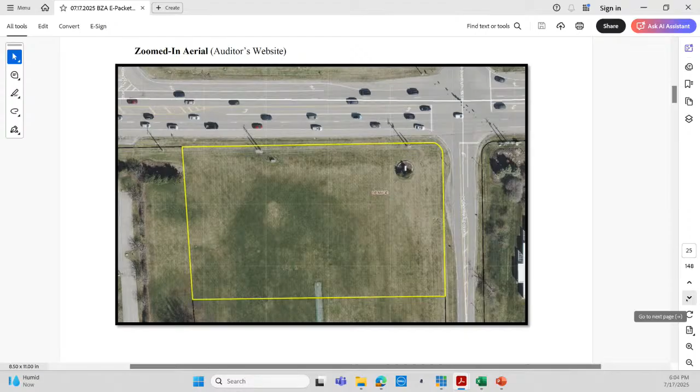Zoomed out, this is at the intersection of East Powell Road and Green Meadows Drive South, about a half block or so east of US 23.

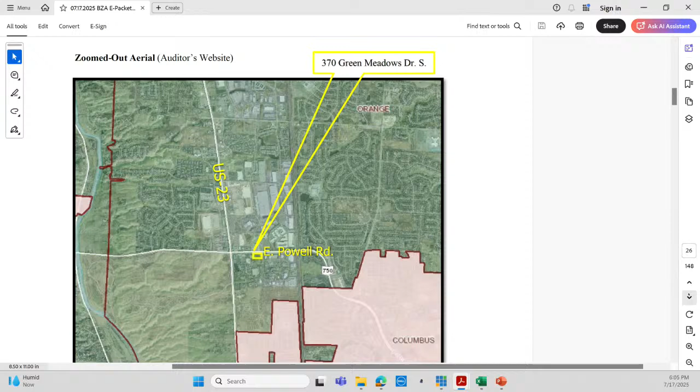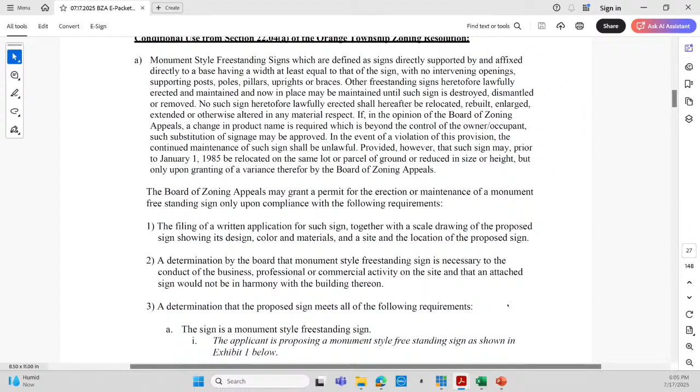All right, so staff review, this is from section 22.04A, which is the conditional use standards. So we'll jump down to A, starting with 3A. You may disregard the highlights too, those can be overlooked.

So a determination that the proposed sign meets all the following requirements, that it is a monument-style freestanding sign. The applicant is proposing a monument-style freestanding sign as shown in Exhibit 1 below. The maximum height of such sign does not exceed 8 feet above the average grade of the site, and the sign is located at a distance from any street right-of-way line as required. So according to the Exhibit 1, the proposed sign will be 8 feet 0 inches tall and meets this requirement. I will note that this is a difference from the previously proposed application.

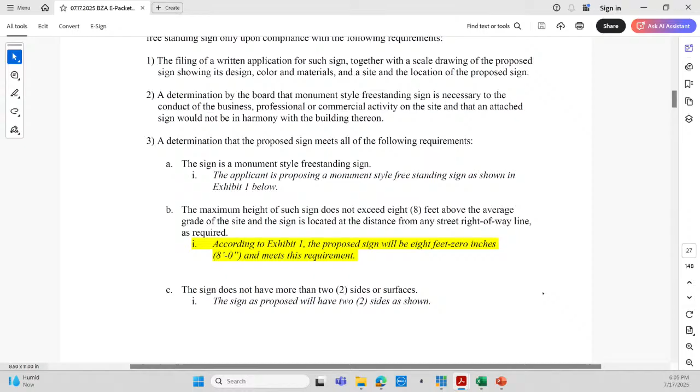So the sign now meets the height requirement. For C, the sign does not have more than 2 sides or surfaces. The sign as proposed will have 2 sides as shown. The display area of any one side or surface does not exceed 1/2 of the total display area permitted. A single sign face totals approximately 64 square feet, when only 64 square feet per face is permitted, and it meets this requirement.

For E, the total display area of all surfaces does not exceed 32 square feet, or a maximum of 16 square feet per side or surface, when the sign is located 15 feet from the primary frontage street right-of-way line. For each additional 1 foot setback from the street right-of-way line, an additional 8 square feet of total display area, or maximum of 4 square feet per side, will be permitted up to a maximum of 128 square feet total, or 64 square feet per side.

The proposed 2-sided sign will total approximately 64 square feet per side and 128 square feet for both sides. The sign will be set back 32 feet and 10 inches from the right-of-way line along East Powell Road, so only 64 square feet per side is permitted. I will note that that meets the above requirements.

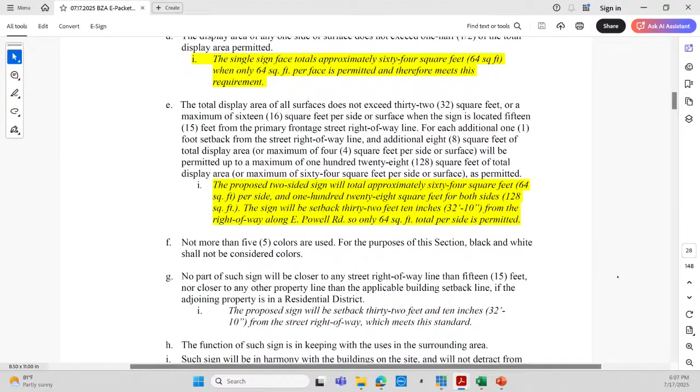For G, no part of such sign will be closer to any street right-of-way line than 15 feet, nor closer to any property line than the applicable building setback line if the adjoining property is in a residential district. The proposed sign will be set back 32 feet and 10 inches from the street right-of-way line, which meets this standard.

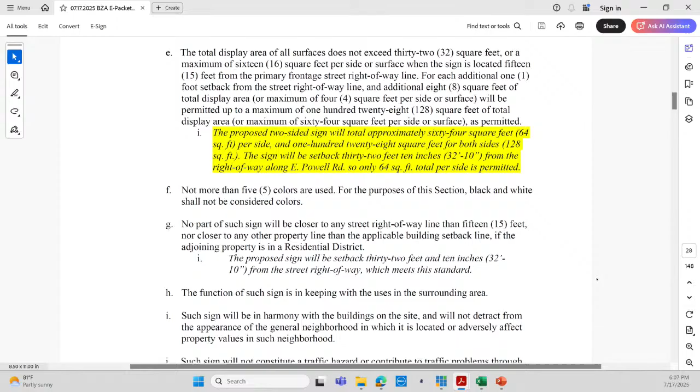Now we'll move along into the exhibits. Exhibit 1 includes the monument sign site plan. This is unchanged, essentially. It's the same location as existing, which we measured as 32 feet and 10 inches at the closest point from a right-of-way line.

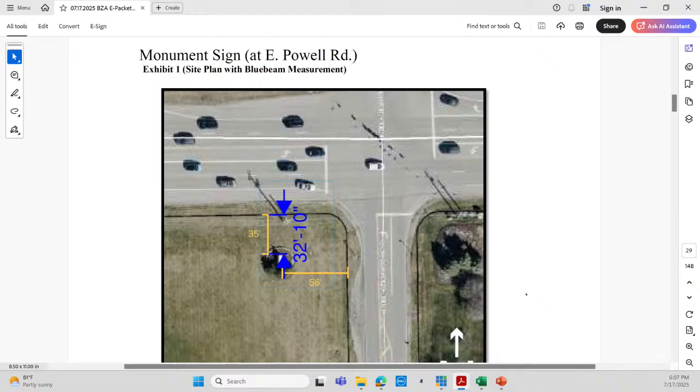Finally, we have the conditional use board analysis and criteria for the board's consideration, as well as example proposed motions. I'm happy to answer any questions the board has at this time.

Any questions from the board? No questions. Just a reminder, I am recusing myself from the nationwide cases. Okay, thank you for that mention. I'd also like to make everyone aware that I was not here for the last meeting regarding these signs, but I have watched the minutes and taken in all of the information, and I'm prepared for a decision this evening. Appreciate that as well, Ms. Ross. Is the applicant here?

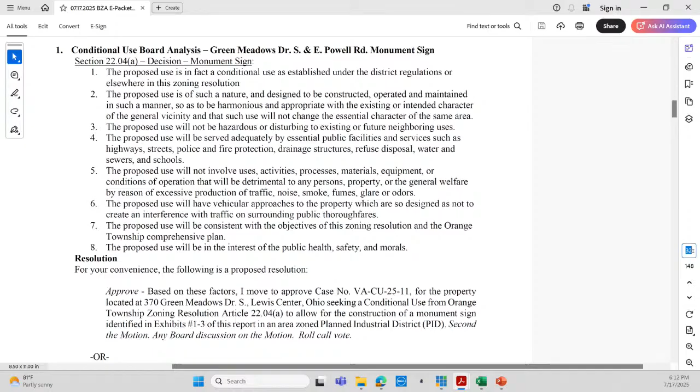Okay, we will go into the second Nationwide Realty Investors case. This is an item of new business, submitted before the deadline for tonight's meeting. This is for the same location that a previous case was proposed for last month, at 23 and Green Meadows Drive T-intersection.

So I will refer to the new staff report. The site here is 370 Green Meadows Drive South, and this is that 28.6 acre parcel.

This request entails seeking two area variances from Section 22 to allow a monument-style sign which exceeds the allowable display area and exceeds the maximum permitted height. Also, this is seeking a conditional use from the Orange Township zoning resolution to allow a monument sign.

So I believe, and we will double check with Julie, but they will also need a variance request to allow for that additional monument-style sign per business establishment. So there will be 2 monument-style signs on the same parcel.

The subject parcel is located at 370 Green Meadows Drive and is owned by 100 Green Meadows Drive LLC. It is the location for the current Nationwide Hotel and Conference Center.

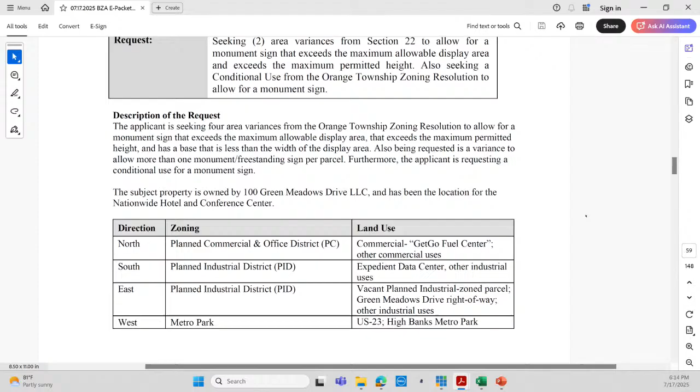Since we have some changes here as compared with the previous application, I tried to summarize the history. Let me go right into that.

Previously, an exterior modifications permit was submitted under permit number 2024-0545 and approved October 31st, 2024, for the site to undergo changes, including a new patio with retaining walls, seating walls, grill, outdoor cooking areas, concrete footers, all located along the southeast side of the primary building.

During last month's BZA meeting, which occurred June 12, 2025, for the monument-style sign, the applicant requested 4 area variances from the Orange Township zoning resolution, including for sign area display, maximum permitted height, a base that was less than the width of the display area, and more than one monument freestanding sign per business establishment on the same parcel, as well as the conditional use. Only the height variance was granted at 18 feet 0 inches at that meeting.

The previous sign was proposed at 198 square feet of area per side, with dimensions 18 feet tall by 12 feet wide. By comparison, the sign being presented within this application is 116 and a half square feet of area per side, with dimensions of 14 feet 9 inches tall by 8 feet 8 inches wide.

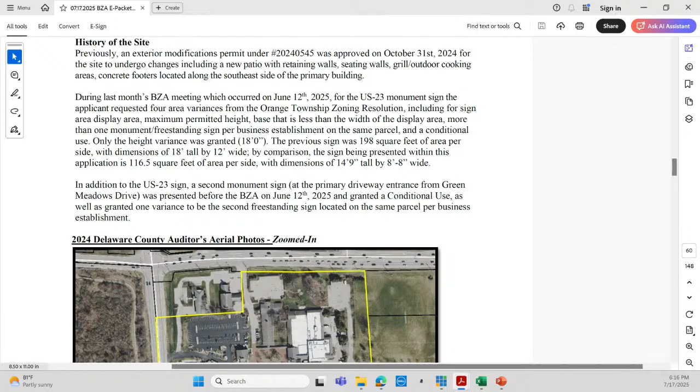In addition to the US 23 sign, a second monument sign at the primary driveway entrance from Green Meadows Drive, a little bit to the east, was presented before the BZA that same meeting and granted a conditional use, as well as granted one variance to be the second freestanding sign located on the same parcel per business establishment. Given that they're presenting a new sign, we're putting that variance back just to be crossing our Ts, dotting our Is.

Into the aerial photo views. This is the zoomed-in aerial, and the request, as you may remember from the last meeting, includes the sign area that is at the far southwest part of the parcel.

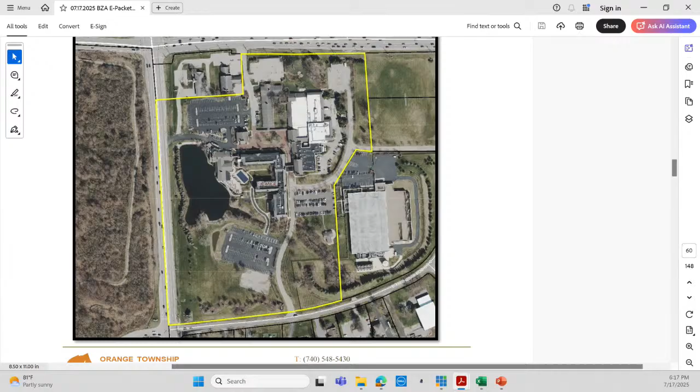We'll have the zoomed-in view from the applicant's plans here. And the zoomed-out view includes the 28-acre parcel. It shows the outline there, and this is at the intersection of US 23 and East Powell Road.

As for the last case, I will go through the conditional use criteria. For section 3A, determination that the proposed sign meets all the following requirements: the sign is a monument-style freestanding sign. The applicant is proposing a monument-style freestanding sign as shown in exhibits 1 through 5 below. The maximum height of such sign does not exceed 8 feet above the average grade of the site, and the sign is located at the distance from any street right-of-way line as required.

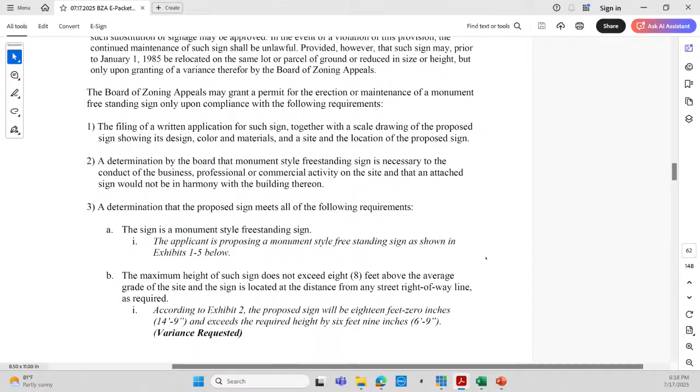According to Exhibit 2, the proposed sign will be 14 feet 9 inches, which exceeds the required height by 6 feet 9 inches. The maximum allowable height is 8 feet, and this exceeds that by 6 feet 9 inches. Therefore, a variance is required.

For C, the sign does not have more than 2 sides or surfaces. The sign as proposed will have 2 sides as shown.

For D, the display area of any one side or surface does not exceed half of the total display area permitted. The single sign face totals approximately 116.5 square feet, when only 64 square feet per face is permitted, so a variance is being requested.

For E, the total display area of all surfaces does not exceed 32 square feet, or a maximum of 16 square feet per side, when the sign is located 15 feet from the primary frontage street right-of-way line. For each additional foot setback, an additional 8 square feet of total display area, or 4 square feet per side, is permitted, up to a maximum of 128 square feet total, or 64 square feet per side.

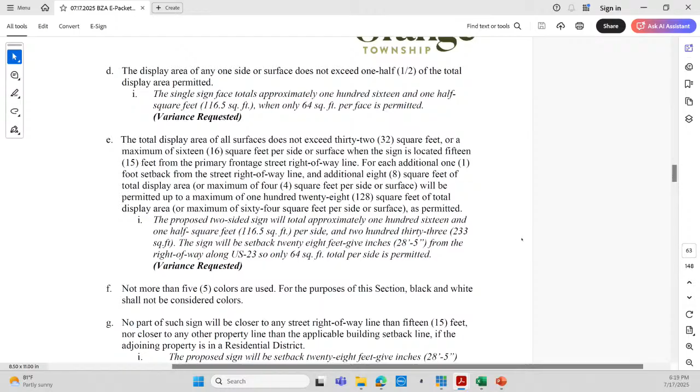The proposed 2-sided sign will total approximately 116.5 square feet per side and 233 square feet for both sides. The sign will be set back 28 feet 5 inches from the right-of-way line along US 23, so only 64 square feet per side is permitted. That means a variance is being requested for this.

For G, no part of such sign will be closer to any street right-of-way line than 15 feet, nor closer to any property line than the applicable building setback line if the adjoining property is in a residential district. The proposed sign will be set back 28 feet 5 inches from the street right-of-way line, which meets this standard.

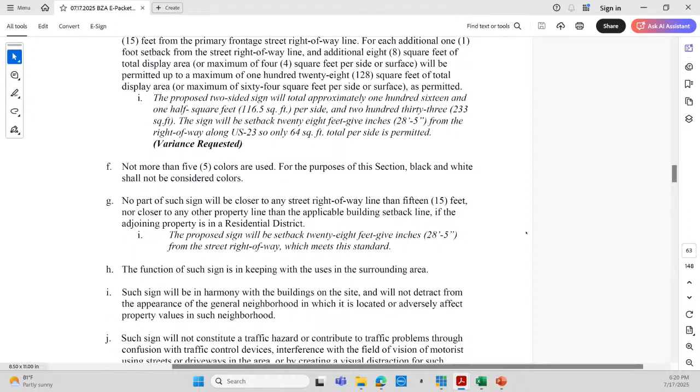All right, that was it for our responses to the criteria. Continuing with the staff review is the exhibits.

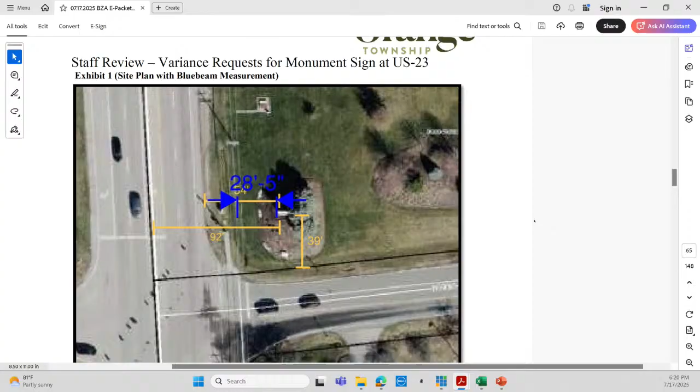This is the zoomed-in exhibit I was referring to that establishes the proposed location, which is essentially the same as the existing sign, at 28 feet 5 inches from the right-of-way line.

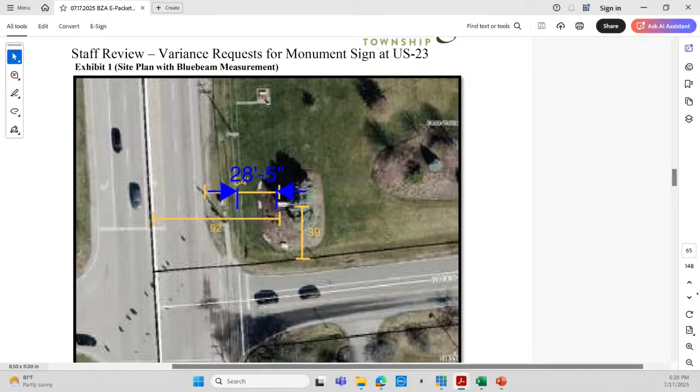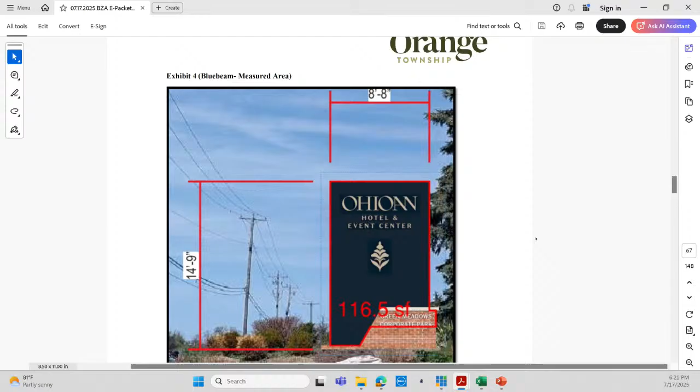Exhibit 4 shows the measurement for the area per side. That does include the lettering just below the blue area on the brick, which refers to Green Meadows Corporate Park.

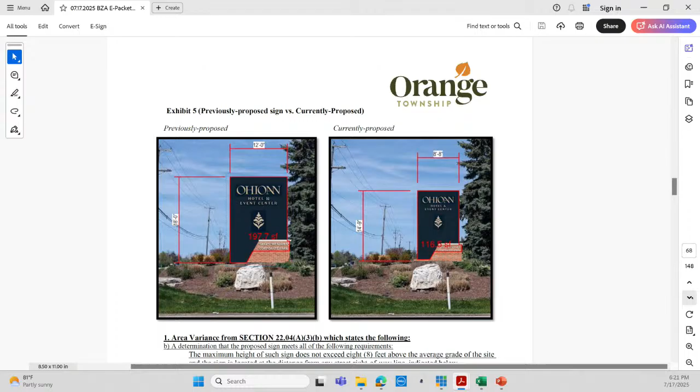Just to make a comparison to the last case you saw, the previously proposed sign, 197.7 square feet, is shown on the left. The currently proposed sign, 116.5 square feet, is shown on the right.

As far as the variance, this is an area variance from Section 22.04A3B that requires the maximum height of such sign not exceed 8 feet above average grade, with the sign located at the indicated distance from any street right-of-way line. The monument sign at US 23 is proposed to be 14 feet 9 inches, representing a 6-foot 9-inch variance request. This is roughly an 84% variance request from Section 22.04A3B.

For the second variance, that's an area variance from Section 22.04A3E, which states in part the following, and we included the table showing the allowed area based on the distance setback. With this being further than 27 feet away from the right-of-way line, the sign must be 64 square feet per side and 128 square feet for both sides at its largest.

The display area of the monument sign proposed at US 23 is 116.5 square feet, which exceeds the maximum of 64 square feet per side or surface by 52.5 square feet. This is roughly an 82% variance request.

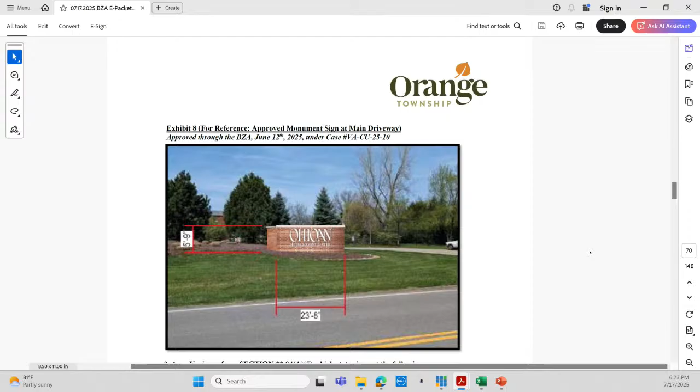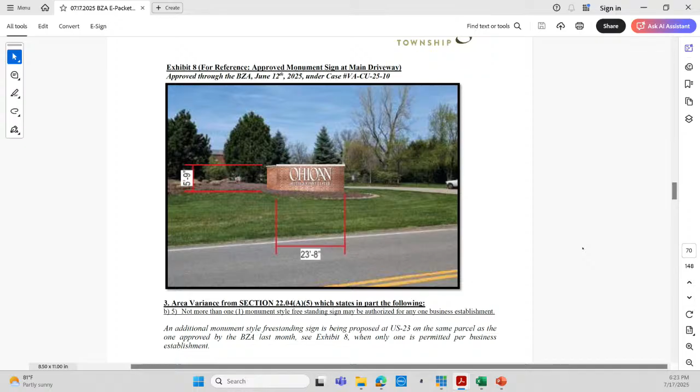Included is the sign that you, as the BZA, had approved in the last meeting, just for your reference. Below that is the third area variance that is needed, from Section 22.04A5, which states in part the following.

Not more than one monument-style freestanding sign may be authorized for any one business establishment. An additional monument-style freestanding sign is being proposed at US 23 in Green Meadows on the same parcel as the one approved by the BZA last month in Exhibit 8, when only one monument-style freestanding sign per business establishment is allowed.

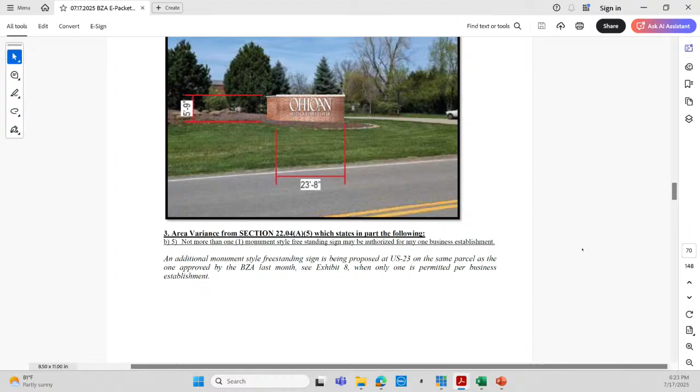All right, well, the last part is the criteria for consideration for area variance, as well as the example motions. Please let me know if you have any questions. No questions. Anyone? I don't think we have any questions.

We have taken your feedback into consideration, and we have reduced the size of the ask. We have reduced the size of the sign as we originally designed it, and at this point it is actually a little bit smaller than the existing sign that's there. We have increased the width of the base in order to make sure that is as wide as the rest of the sign, as per code, so we're asking for less variances. And I think that we've done our best to try to accommodate all of your requests.

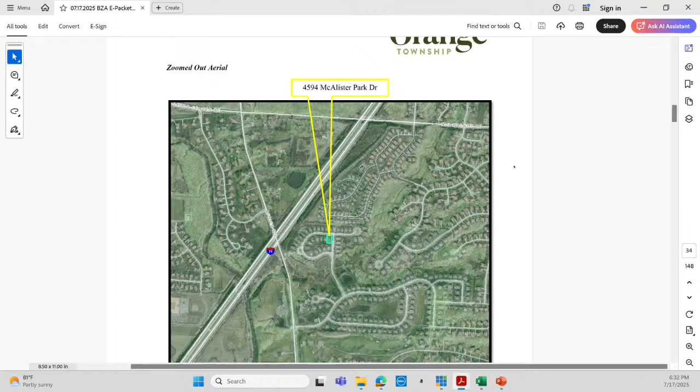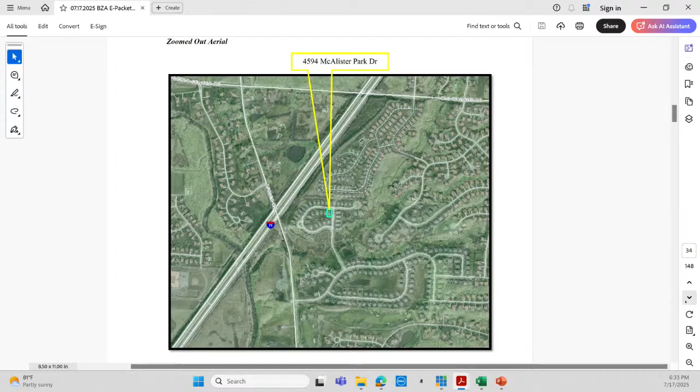We have a zoomed-out aerial for your context view, so it's in the neighborhood here. However, I-71 would border this neighborhood to the west. This zoomed-in aerial shows the property boundaries highlighted in green, and this lot, for your reference, is a corner lot at the corner of McAlister Park Drive and Enclave Drive.

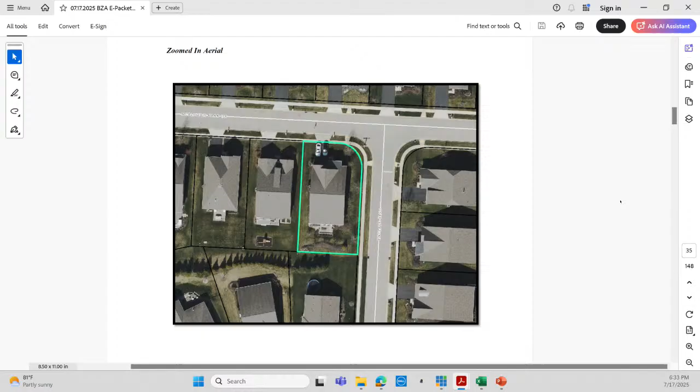Going to the staff review, this is a variance request from the side yard setback. It's an area variance specifically from rezoning case 12-0223, Enclave at the Lakes, SFPRD. The side yard setback requirement in the Enclave at the Lakes is 12.5 feet. The egress window will encroach 3 feet and 0 inches into the 12-foot, 6-inch side yard setback. This is roughly a 24% variance request from rezoning case 12-0223, Enclave at the Lakes, SFPRD.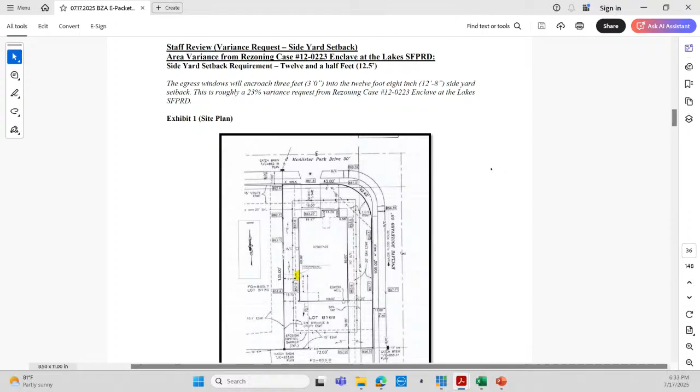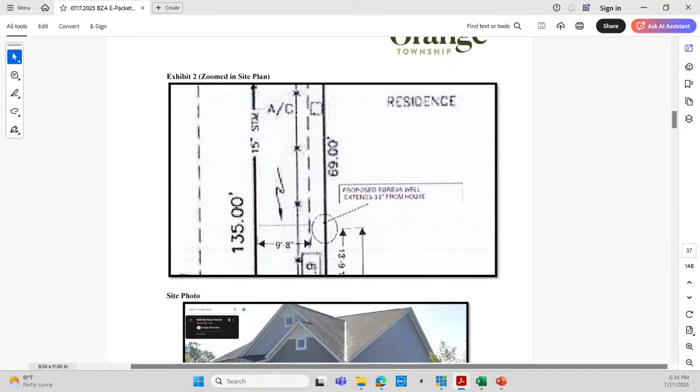It is somewhat faint, so we did blow it up on the next exhibit for you. Zoomed in here, there's the proposed egress window at a 9-foot, 8-inch setback from that side yard with the protrusion of 3 feet. And just to correct, I believe that's a 12-foot, 8-inch side yard that's required, so that's why we have the 3 feet and 0 inches encroaching listed.

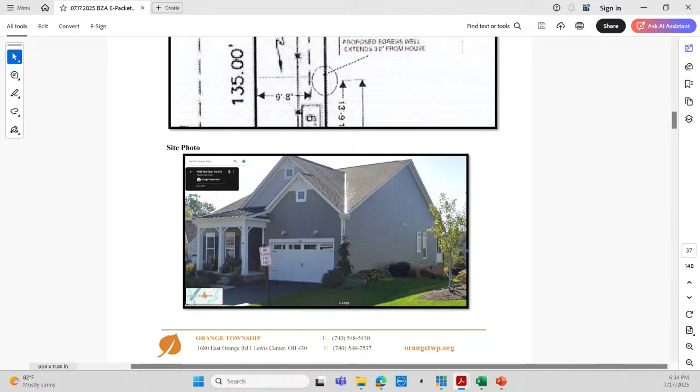We did take a site photo view that generally shows you the side of the house, which is opposite the corner side, so it's opposite the two-street side that is being proposed. The last section is just the criteria for consideration for the area variance from side yard setback, and example motions.

Is the applicant here?

Hello everybody, Charles Kovach, 4594 McKinley Park Drive, Westerville, 43082. You've been sworn in, yeah. And Jennifer Kovach, 4594 McKinley Park Drive, Westerville, Ohio, 43082, and I've also been sworn in.

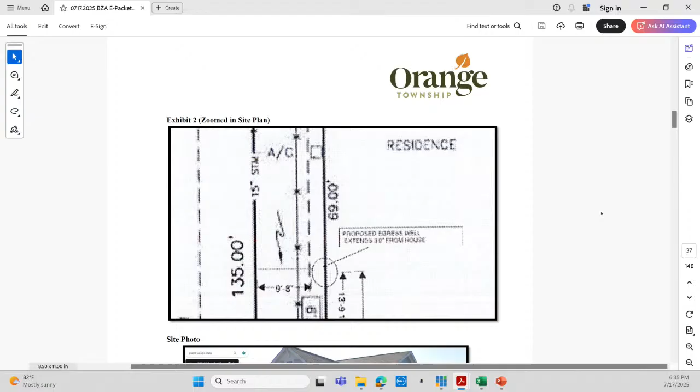I work from home, my office is in the basement. I would love some natural light. As you see, it's not my tree, it's like yards there, but the window well would not even go past the mulch bed. It's closer to my house than the air conditioner that's on that same wall. We've also had it approved by our homeowners association as well.

Okay. Questions from the board?

Questions? If the HOA approved it, then I'm not sure what we... I saw, I'm sorry, go ahead. I saw in here they said you have to have it done within 90 days. Are you good with that? Contractor's ready as soon as we call him. Doesn't matter to us, I was just...

All right, we can move this one to next month, right? Shoot, he needs some light. Get some plants down there.

All right, can we make a motion? Yep, public comment, do you have a question? Wait, oh wait, other comments? Public comments?

Is your next door neighbor here, the one that is in between? Okay, okay, thank you. Now, now, now, impatient, aren't I?

Based on factors discussed this evening, I move to approve case number VA 25-12 for property located at 4594 McKinley Park Drive, Westerville, Ohio, seeking an area variance from rezoning case number 12-0223, Enclave at the Lakes, to allow for an egress window to encroach into the 12-foot, 8-inch side yard setback in an area zoned single-family residential district.

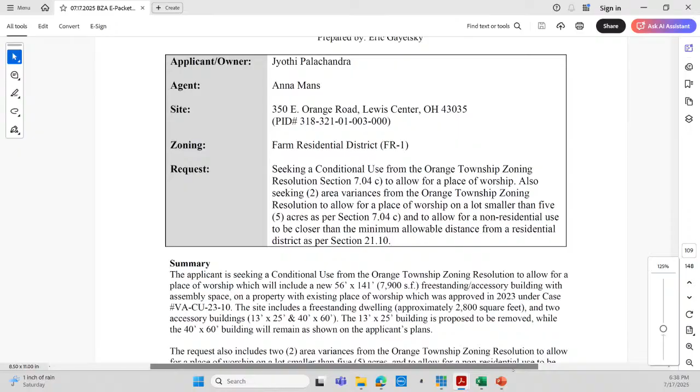The applicant is seeking a conditional use from the Orange Township zoning resolution to allow for a place of worship, which will include a new 56 by 141, which is 7,900 square feet, freestanding accessory building with assembly space on a property with an existing place of worship, which was approved in 2023 under BZA case VA-CU-23-10. The site includes a freestanding dwelling, approximately 2,800 square feet, and two accessory buildings, which are 13 by 25 and 40 by 60 respectively. The 13 by 25 building is proposed to be removed, while the 40 by 60 building will remain as shown on the applicant's plans.

The request also includes two area variances from the Orange Township zoning resolution to allow for a place of worship on a lot smaller than 5 acres and to allow for a non-residential use to be closer than the minimum allowable distance from a residential district as per Section 21.10.

For the surrounding area, the direction to the north, the zoning district is planned commercial and office district, as well as planned industrial district. The land uses here include Olentangy Local School District offices and a U.S. Post Office, and that does also include the Orange Road right-of-way.

Direction to the south, the zoning district is planned multifamily planned residential district, and the land uses include Hidden Ravines condo residences. To the east, the zoning district is planned commercial and office, and land use includes the toy box. To the west, zoning is multifamily planned residential district and planned commercial office district. The land uses include Hidden Ravines condo residences, which is part of the same property, and Healthy Pets veterinarian.

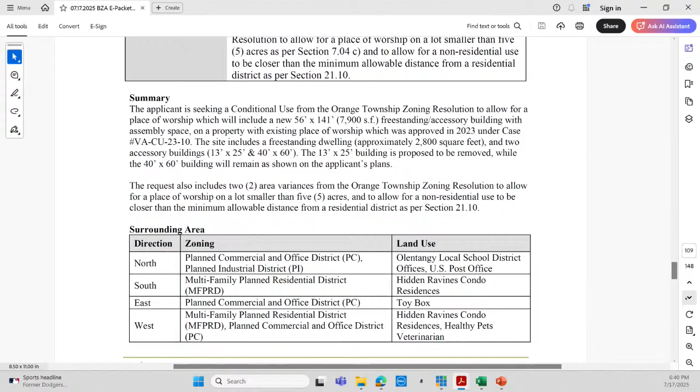Based on some history here at the property, I wanted to include that in the staff report for the board's familiarity. This property was previously granted a conditional use in 1998 under case number 8641 for a home occupation. The first approved use that was here was for a physical fitness and training gym to be placed in the accessory building.

In addition, the applicant obtained a conditional use from Section 7.04C of the Orange Township zoning resolution on May 18th, 2023, to allow for a place of worship under case VA-CU-23-10. As part of that request, the applicant was also granted an area variance from Section 7.04C to allow for a place of worship on a lot smaller than 5 acres.

The place of worship proposed is located at 350 East Orange Road. That was to clarify that it was the variance because of the property being 3.35 acres when 5 acres is the minimum required lot size per farm residential district.

On February 29th, 2024, a zoning permit for exterior modifications under 2024-0129 was approved to allow for the existing gravel parking area to be paved. Furthermore, a conditional use for a monument sign was granted on June 20th, 2024, under case CU-24-15, and approved under zoning permit 2024-0340.

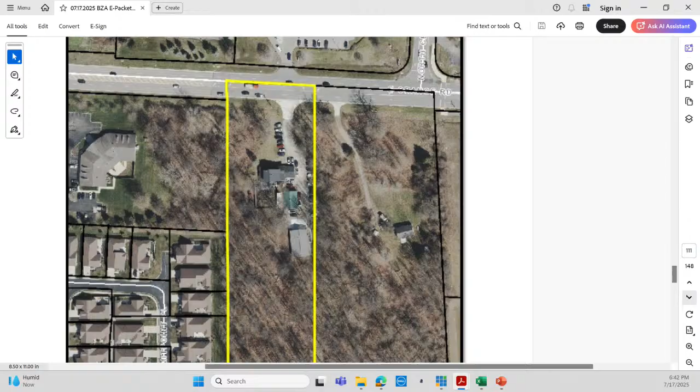Before we get to the exhibits, the staff review portion describing the area variances and conditional use. This is area variance and conditional use from Section 7.04C of the Orange Township zoning resolution. This states in Section C that churches or other places of worship, provided they occupy a lot of not less than 5 acres plus 1 acre for each 100 permanent seats, over 300 in the main assembly area.

The proposed use for a place of worship requires a conditional use granted by the Board of Zoning Appeals as outlined in Section 7 of the Orange Township zoning resolution. As noted above, the applicant was previously granted an area variance from Section 7.04C to allow for a place of worship on a lot smaller than 5 acres, which again was under VA-CU-23-10, approved May 18th, 2023.

The proposed site has a total acreage of 3.35 acres, and in this application, the applicant notes that an occupancy of about 400 people is planned, while according to the applicant, the current facility accommodates about 150 people. No additional acreage is required for the number of seats, but the property does not meet the minimum acreage requirement of 5 acres and requires an area variance.

So the parcel of the proposed place of worship is 1.65 acres smaller than 5 acres. This means that this is a roughly 33% variance request.

For the next area variance, that's from Section 21.10, requirements for non-residential uses abutting residential districts. This states, the purpose of this section is to mitigate the effects of noise, light, and other nuisances emanating from a non-residential use abutting a residential district. Non-residential buildings or uses, except parking, shall not be located or conducted closer than 100 feet to any lot line of a residential district. Such 100-foot area shall include at or near its perimeter acceptable landscaping or screening as approved in the planned district of development, or in the case of property located outside of a planned district, as approved by the zoning inspector.

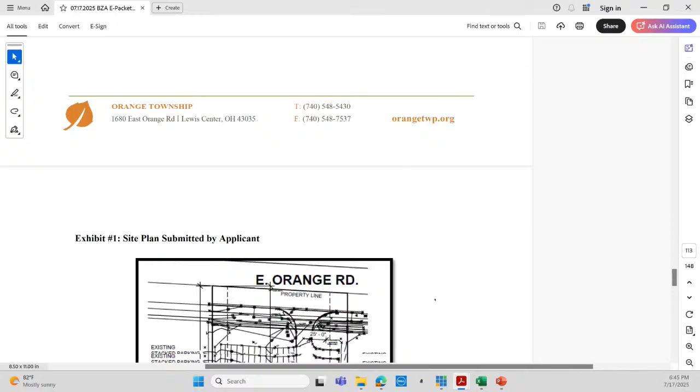So firstly, we have the site plan for the new facility. I do want to touch on that the area that you see hatched includes the new parking facilities that are not currently there. Generally speaking, they will wrap around the new freestanding building that will belong to the temple. You can see, if you look closely, the existing building that is to remain is due east. Well, I should say the new building will be due west of the existing building, with a drive aisle to be in between them.

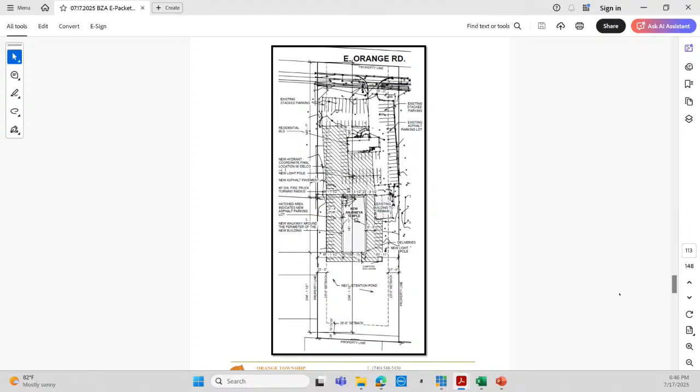For the next exhibit, we zoomed into that proposed site plan, and you can see the measurement that staff obtained, which is essentially 65 feet and a quarter inch away from the residential district. That's the side property line of this parcel.

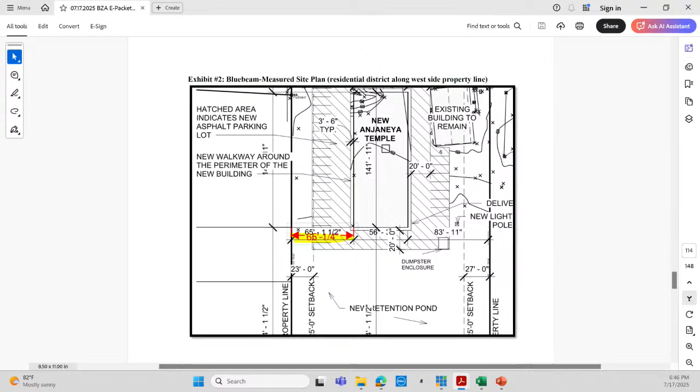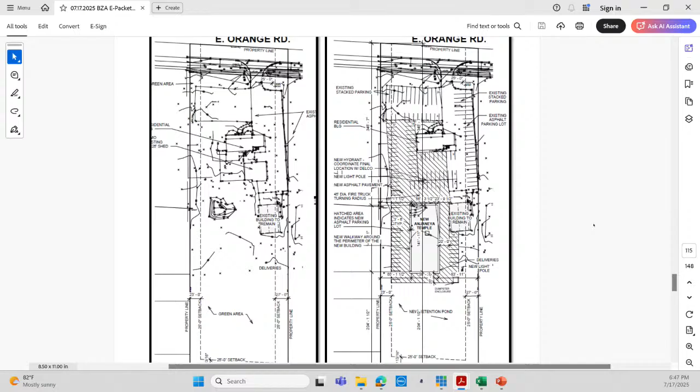For Exhibit 3, we wanted to highlight for the board the existing arrangement next to the proposed arrangement. We'll be happy to answer any questions, but generally you can see the existing building to the southeast. The building in the center, that's 13 by 25, is proposed to be removed, replaced by a parking area, and then the residential building in front of all of that will also remain.

Exhibit number 4 shows the building renderings of the proposed new building for reference. Staff was also able to enter the site for site photos, so I'll just quickly go through those.

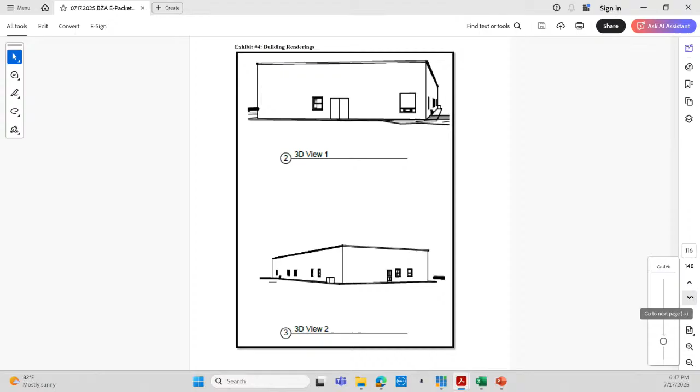First site photo shows the currently existing primary building in the background. The accessory building that's to remain is on the far right side, and the accessory building that will be removed is that white colored building sort of in the middle.

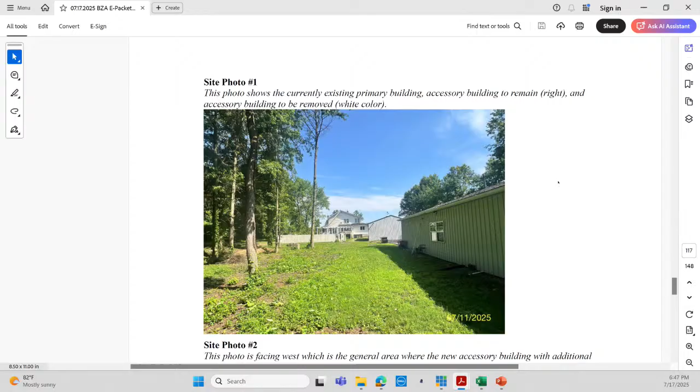For site photo 2, this is facing west, which is in the general area where that new accessory building will be added with the additional assembly space and parking area. There are quite a few trees in that area, some of which will have to be removed to accommodate the new building and parking area.

Site photo number 3 shows that existing 40 by 60 building, which is proposed to remain, as I understand. This is where assembly space generally is currently. Site photo 4 is facing west as well, just slightly zoomed out from photo number 2. A couple more photos, I believe 3 photos to go. This one is facing south, the reverse of the first photo, again showing the 40 by 60 building to remain.

Site photo 6 is the existing parking area with that 13 by 25 accessory building, which is proposed to be demolished. Last but not least is the entry area, just for context, showing the residential building with some of the existing parking area in the front yard area.

I want to make note of the technical agency review we had when speaking with our Orange Township Fire Department. Comments were made indicating that the site circulation would need to be looked at with the new parking area, along with the building proximity to fire hydrants. I want to note this is outstanding; we haven't heard that the fire department has approved thus far.

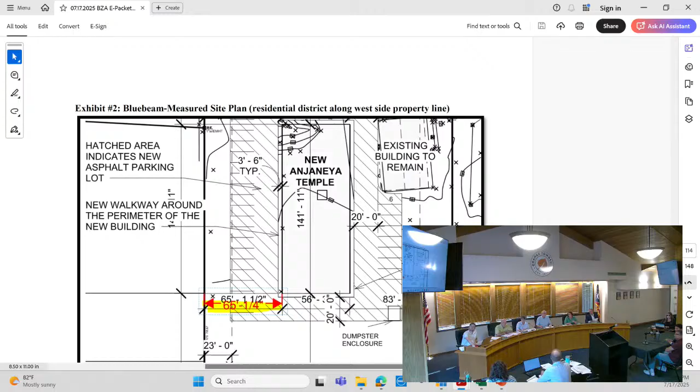Sure. Well, we are looking at this as a new conditional use. Let me back up and state that regardless of the board's decision tonight, that does not impact the existing operation. However, the parameters have changed as far as this being an expanded use. So this is being looked at essentially from square one. The board does need to go through and give them an approval for the use as it's being presented tonight, which is distinguished from what was previously approved, which is a smaller, arguably less intense use. Gotcha, so it's because the use is expanded.

Correct. Thank you. But it is still a church that was approved back in '23. Correct. So a house of worship? Correct. Yes. Thank you. Okay, so that was the key. Regardless of our disposition, they can still remain in operation on that site within their existing buildings and facilities, within the conditional use, correct. Okay, thank you.

So I don't want to beat a dead horse, but I have another question. No, you're fine. Within our purview, in the testimony we hear and the decisions we make, we cannot talk about percentage of green space or coverage of the lot. We cannot talk about architecture changes like a planning and zoning commission could do, nor lighting to a certain degree, number of parking spaces, tree replacement, or the colors of the building and roof that you would typically see in a development plan. So none of those things would also come before the public in a public meeting for discussion and input.

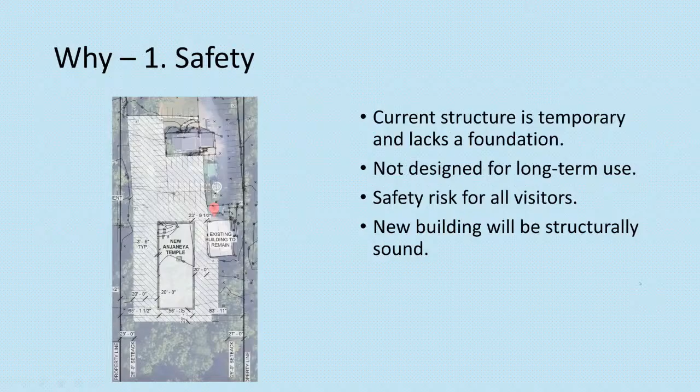We believe it is the right thing to do for the safety of everybody in Lewis Center. If you go to the next slide, there is a second reason why we think this is very important: it is justice. The current structure is too close to the eastern boundary of the current plot. The new building will be more centrally located, and it will be equidistant from both the property lines on east and west.

What you can see is that tall mature trees, we are retaining for 25 feet on each side, both east and west. And there is a much longer, bigger depth of mature trees protecting the view from the south side. For screening purposes, 25 feet of mature trees is not generally required even for industrial complexes. This is something we are providing because we think it is important for the community.

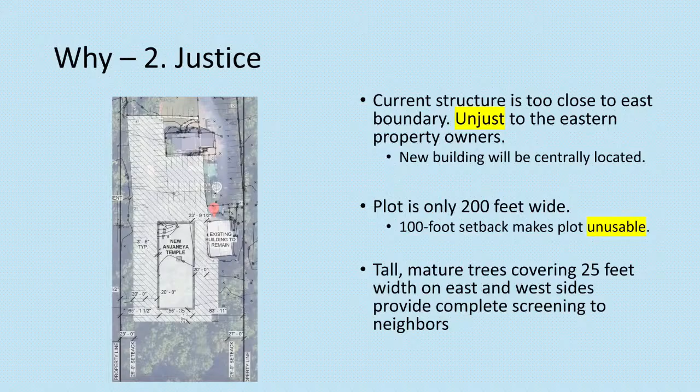And if you go to the next slide, what our structure ensures is safety, and it is just to all neighbors, and it meets the community needs.

One additional thing I want to mention is that we will definitely go through the fire department and the Delaware County Engineer's Office for storm drains, to make sure the storm drains at the front are done right. We don't want to cut corners or take shortcuts. This is a one-time right thing that we are planning to do, and that is why we want to get this permit today, so we can go to the Delaware County's office and say, this is what we are planning, and we want to build everything from the ground up correctly, not operate in a temporary structure.

What we are willing to consider additionally today, if you want to use these as conditions of approval: we are willing to remove the existing additional structure that is currently being used, which will reduce the square footage of what we are proposing. Secondly, on the west side, where the concern is about the 65 feet from the current boundary, we are willing to remove the 18 parking spots on the west side, so there are no parking spots on the west side of the building. We currently have planned for 174 parking spots, which is 39 spots above and beyond what is required by zoning, so we are okay with removing 18 and having no parking on the west side, if that is a concern.

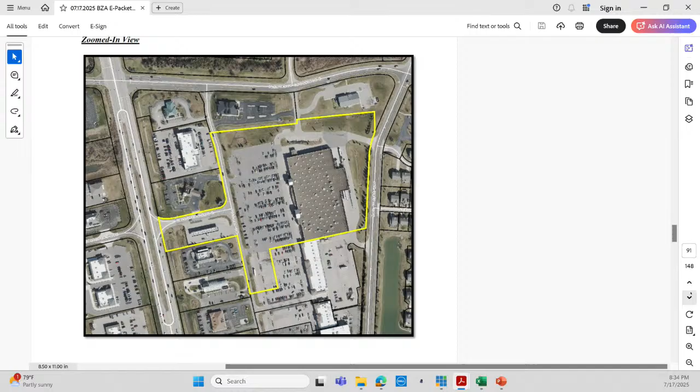We have our aerial views. I think that you can make out the border of the plaza here, just north of Lewis Center Road. The Kroger Plaza parcel again includes the grocery store as well as the Kroger Fuel Center. Tighter view on both of those elements, and you can see the parking area predominantly in between the Kroger Fuel Center and in front of the store.

Okay, so for the staff review, the exhibit labeled Exhibit 1, we're calling it Wall Sign A. That refers to the proposed new location of the Pickup Pharmacy and Drive-Through sign that is currently located at its approved location of 14 feet above grade on the same facade that it is proposed to be moved higher at. So there's that existing 14-foot height.

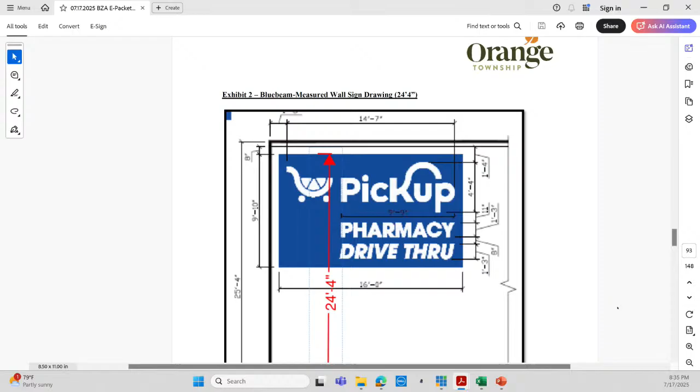The next feature is showing the wall sign A at the proposed height of 24 feet 4 inches above grade. This is a repeat, slightly more schematic view with that 24 feet 4 inches labeled.

So the wall sign is proposed to be relocated 10 feet 4 inches higher than its current location, to a height of 24 feet 4 inches above finished grade, which exceeds the 15-foot height requirement per section 22.03C1 by 9 feet 4 inches. This is roughly a

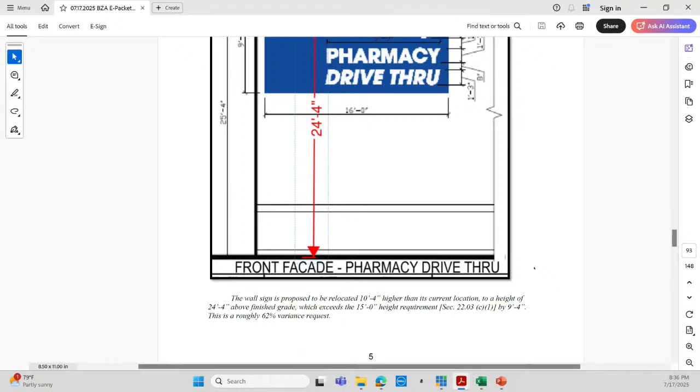All right, and there's no technical agency review here. The final section is the board analysis criteria for consideration, as well as example motions.

Same sign moved up. Precisely. Okay, just making sure that it wasn't, I simplified it in my head, just making sure it was that simple. There's some discrepancies.

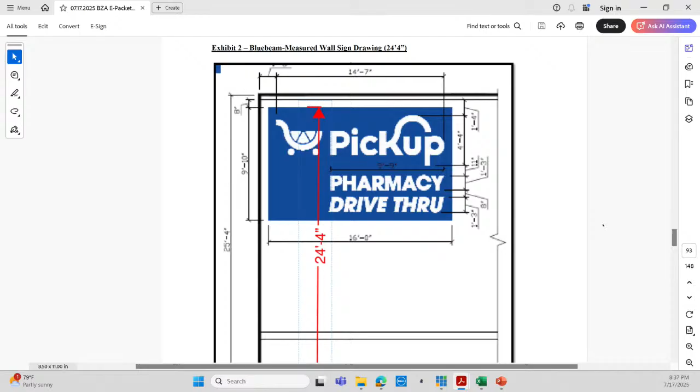On the height, proposed heights I'm seeing in the documents, for instance one is stating the top of the sign is 24 feet 4 inches on wall sign. Then on the back exhibit there was another place, on the area 25 variance application, first page, the applicant says to allow a wall sign to be installed at a height of 19 feet for a variance of 5 feet.

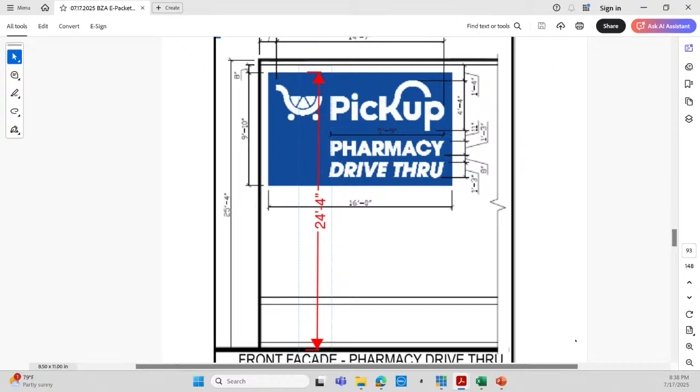To be clear, that 24 feet 4 inches came from our software's review, our software's measurement, based on this particular plan view. So if the applicant has made some kind of an error, and this is not the correct plan to be measuring from, the applicant can shed light on that. However, we did base it on the scale provided in that specific plan view.

Yeah, there's 3 different dimensions there: 24,4, 25,4, and then 19 in the application. Good catch. It's confusing.

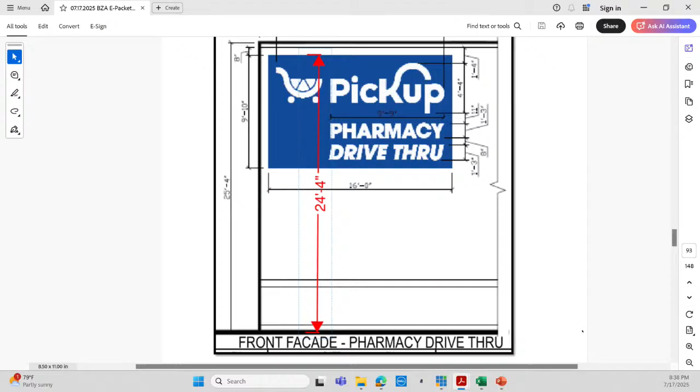It seems to me, when I'm looking at the illustration of the existing proposed, and I'm just counting the brick courses, it looks like they're lifting it up about 4'8", so basically 18 foot 8 inches is what it seems on that proposed photograph, which proportionally looks appropriate to the building, instead of covering that frieze element at the top. You definitely don't want to be covering it. I won't say anything further. It's just hard to make the vote, or a consideration, without clarity on that dimension.

Perhaps the applicant is aware of the height of the building itself. So I do see a label 25 feet 4 inches on the drawing that we measured from. Yeah, that's to the top of the building. And then that banner or border around the top is, right? Based on their drawing.

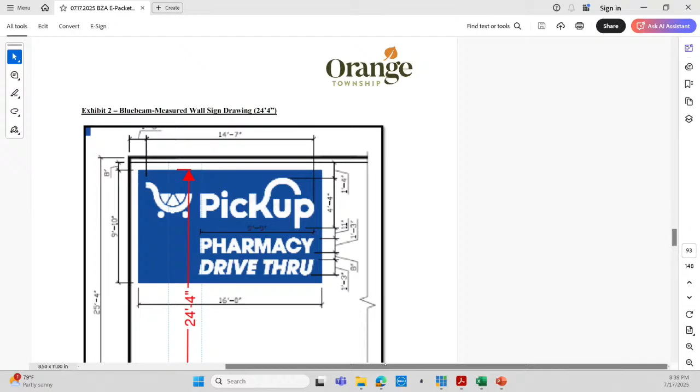I assume you are the applicant? Would you like to come up and clarify this? So I was told that it would be. Name? Hello, my name is Rebecca Green.

I'm working with Sign Vision today, and my address is 74 Glen Drive, Worthington, Ohio, and I was sworn. Thank you. Starting again, I was told that we would be placing this at a 19-foot height, and I'm as confused as you are about that particular measurement there, but they want it to only go 5 feet from its existing location.

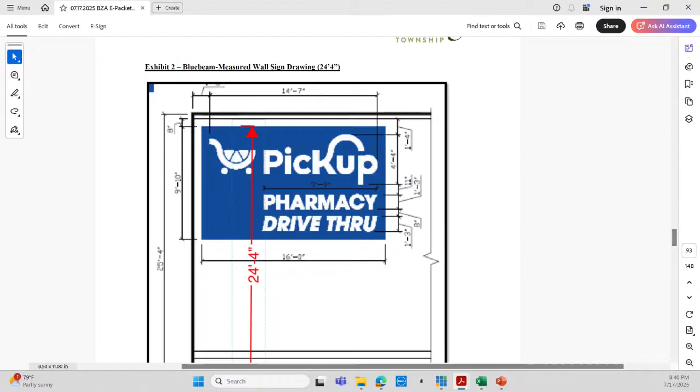It's going to be the same sign. They're just going to lift it up just underneath the cornice, leaving a little brick kind of to frame it. The purpose of, I brought this, but we had a long meeting, so we'll just kind of go through it quickly. This is, if you can just pop through it.

Would you mind speaking up just a little bit? I'm sorry, a little hard of hearing. I apologize, a little dry from sitting still so long.

It's quite a long way from the access points to Kroger across that parking lot, and we want to keep all those traffic people who are wanting to use our pickup services and drive-through services to go up north and then straight east to those services. So when you're hitting that lot, you're not in a place where people are walking, putting their carts away, or trying to control the kids and put the groceries in the back. We want everyone on that north side.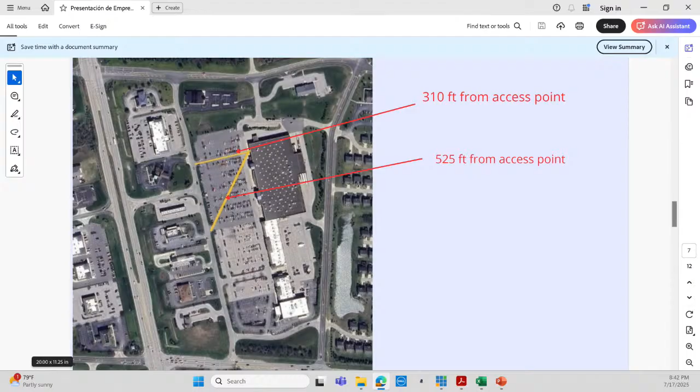If we could go a little farther. The purpose, obviously, is that it's quite a long way as you access that lot to the sign. So if we lifted it a little bit, it would be easier to see. That's really what we're doing.

Here's a view of one of the access points. You can see it behind some pickups over there. Let's go again. This is the north side of the building where all the pickup services are. You can see the row of curbside pickup locations, and then the canopy where the drive-through pharmacy services are. If we could go a little farther.

From the aerial view, you can see just above the green landscaped area, that's where the pickup services are. Again, our goal is just to keep people moving on the exterior part of this lot, towards these pickup and drive-through services. We believe that pushing that up a little bit will help us keep that lot safer. That is the purpose of our variance.

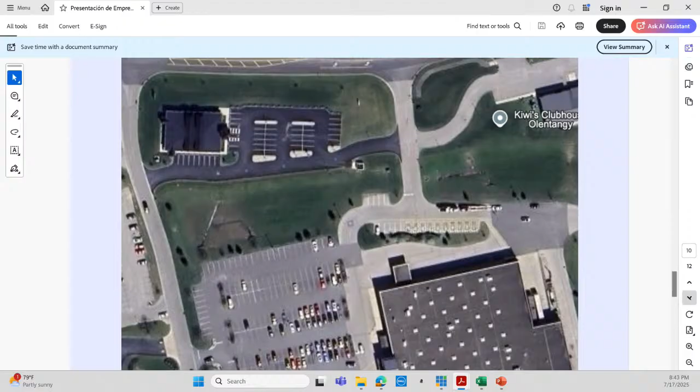I don't know what else is in there. These are the signage in the pickup area. And then just a little summary. I'm happy to take any questions.

That's good. No questions here? That's good. And I'm just wanting the 19. I don't want the... yeah.

I would make a motion to approve if we are certain that the language is correct in the approval now, based on the 19 feet. It looks like the applicant's sign drawing that says Cummins is the one that we had measured from. It sounds like that's not the one they're requesting — they're only requesting 5 feet. Correct. So that's the variance request that they're asking for: 5 feet. So on page 7.

Yeah, it says... that's what I'm trying to figure out — we change it to be from 9 feet 4 inches above the allowed 15 feet 0 inches. Are those the correct numbers now, or? No. Nope. So that would need to be revised to 5 feet and 0 inches. Okay.

Is the applicant okay with that? Yes. Okay.

I will make a motion, based on the testimony that we've heard and factors considered, to approve case number VA-25-14 for the property located at 6417 Columbus Pike, Lewis Center, Ohio, 43035, seeking one area variance from Orange Township Zoning Resolution Section 22 to allow for the wall sign identified in this report as wall sign A to be 5 feet 0 inches above the allowed 15 feet 0 inches in an area zoned planned commercial and office district, PC.